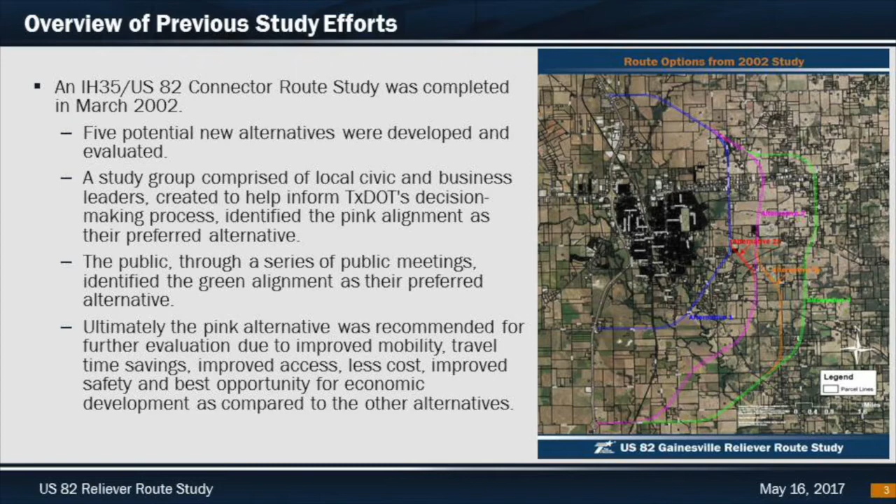The public, through a series of public meetings, identified the green alignment as their preferred alternative. Ultimately, the pink alternative was recommended for further study because of improved mobility, travel time savings, improved access, less cost, improved safety, and the best opportunity for economic development as compared to the other alternatives.

Due to a lack of funding, the project effort stalled until a US 82 feasibility study was completed in 2012. That study identified mobility issues along US 82 and evaluated 7 different route alternatives that could address these issues. Ultimately, Alternative D was selected in the southeast quadrant of Cooke County as the locally preferred alternative based on analysis of each of the alternatives and input from stakeholders and the public.

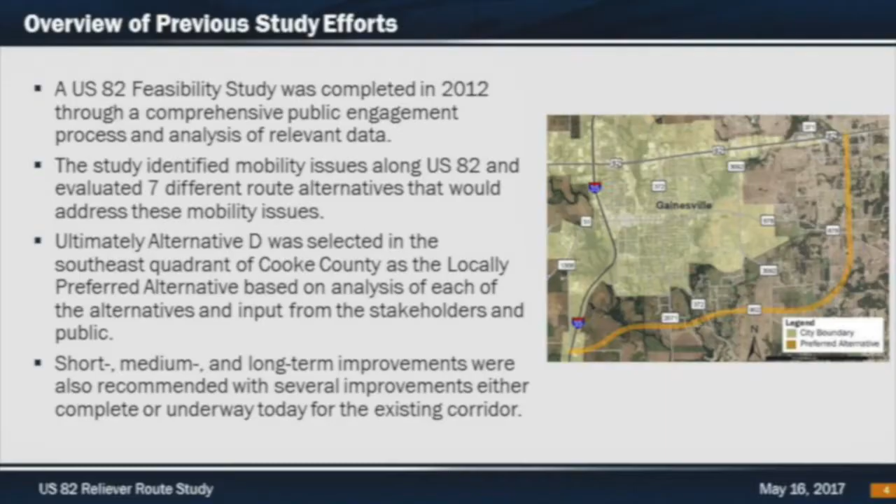Short, medium, and long-term improvements were also recommended along the corridor, with several improvements either complete or underway today for the existing US 82 corridor. Even with these improvements, it became clear to TxDOT and local officials that more needs to be done.

For the current US 82 reliever route study that we're here to talk about today, TxDOT formed a work group comprised of local civic and business leaders to help guide us through the study. The work group reviewed the 3 recommended alternatives from previous studies and identified several new alternatives, ultimately bringing 7 alternatives to the public for input in October 2016, along with a no-build alternative.

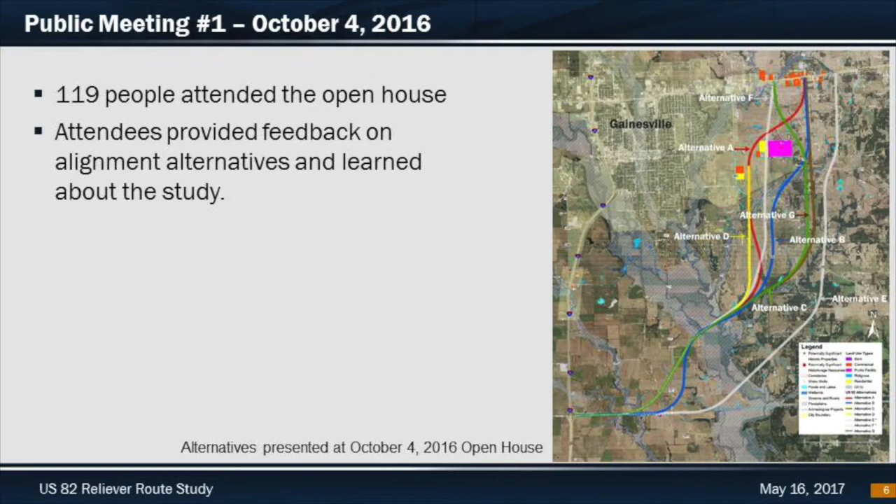On October 4, 2016, TxDOT hosted an open house to get feedback on 7 alternatives. Here, you can see the alternatives that were presented at the meeting. 119 people came out for the open house, and TxDOT received a lot of valuable feedback. Feedback was received via comment forms, email, phone calls, and regular postal mail.

In addition, TxDOT received comments about construction cost, access to property, economic hardship, the impact a reliever route would have on the community, and traffic congestion. After reviewing feedback from the open house, TxDOT developed an online survey to get more input from the public and stakeholders on alternatives. The survey was available from November 10th until December 7th, 2016.

Survey takers were asked what alternatives they recommended using. This information was used by the study team to help refine the alternatives that are being evaluated today. The alternatives being evaluated today were developed and refined based on previous studies, workgroup input, feedback from the first public meeting, preferences from the online survey, and engineering guidelines from TxDOT.

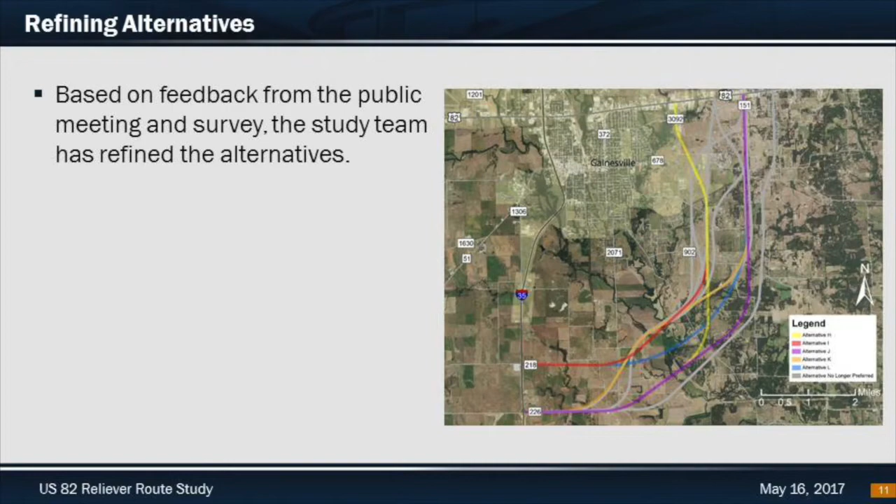We then conduct the initial screening to narrow the alternatives further, which is where we are today. Using all gathered data, professional judgment and public input will then narrow to the most reasonable alternatives. And finally, after construction costs are defined, safety, mobility, and right-of-way impacts are determined, and environmental impacts are quantified, we will reach the draft recommended alternative.

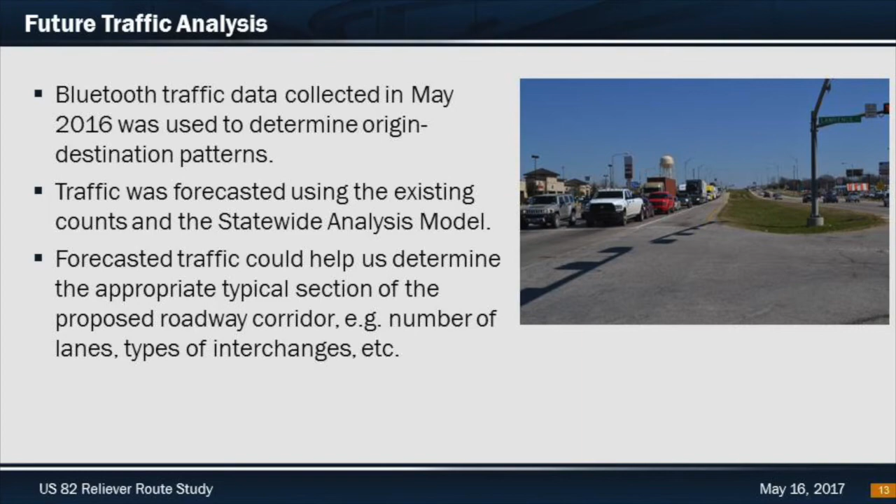The project team gathered Bluetooth traffic data in May of 2016 to determine where people are coming and going in the corridor. Using TxDOT's statewide analysis model, we forecasted traffic that could use a potential reliever route in the future. Ultimately, the forecasted traffic could help us determine the appropriate design of the proposed roadway corridor. For example, the number of lanes as well as types and locations of interchanges.

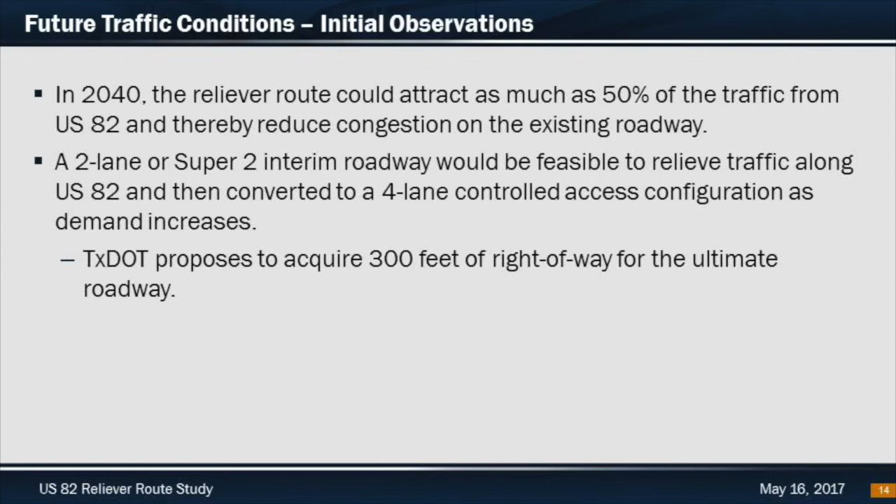Our initial observations project that the reliever route could attract almost half of the US 82 traffic in 2040. A 2-lane or Super 2 roadway for the reliever route would improve mobility along US 82. Ultimately, a 4-lane controlled access highway could be developed as traffic increases. To do this, TxDOT has proposed acquiring a 300-foot right-of-way to meet the needs of the controlled access roadway.

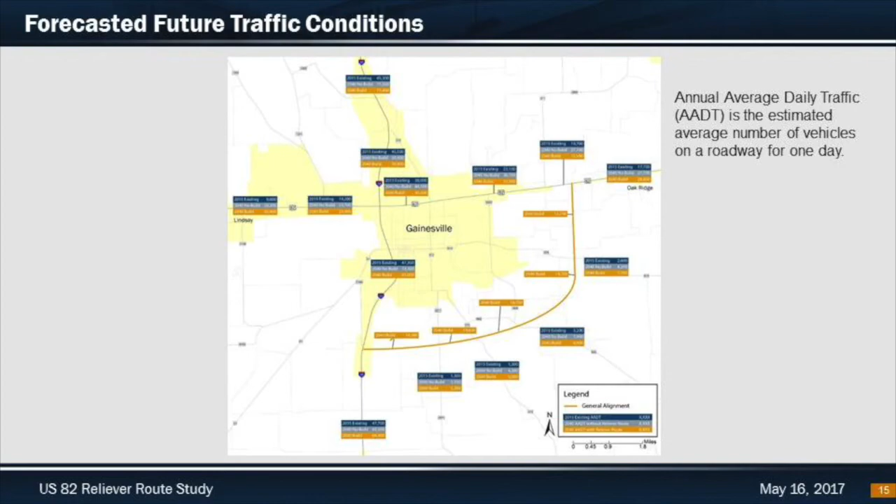This slide provides an overview of what current traffic looks like in the area, as well as what it is forecasted to look like in 2040 with and without a reliever route. In the next few slides, you will see that the 5 alternatives as well as a no-build alternative were evaluated and weighed against each other based on the following.

Cost effectiveness. Is the alternative's length significantly longer than the average of all alternatives, thus increasing cost? And environmental impacts. Looking at potential displacements to residential and commercial structures, potential noise impacts, and impacts to floodplains, wetlands, and parks, are these significantly more than the average of all alternatives?

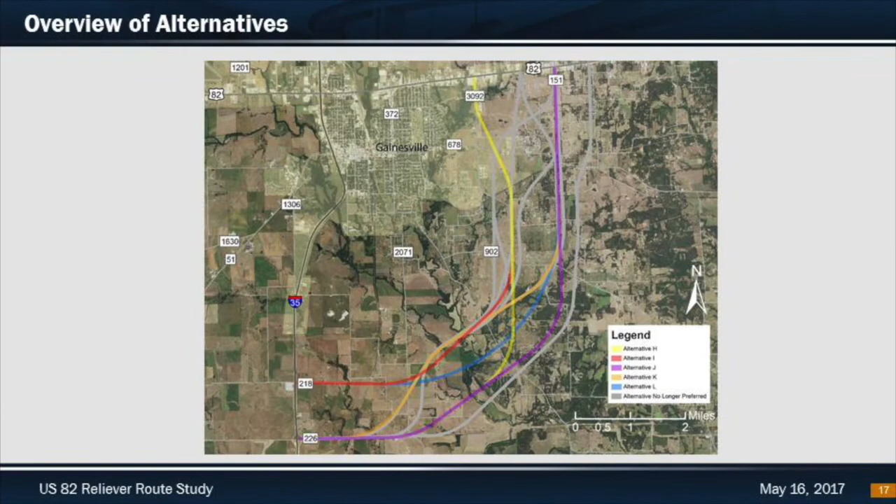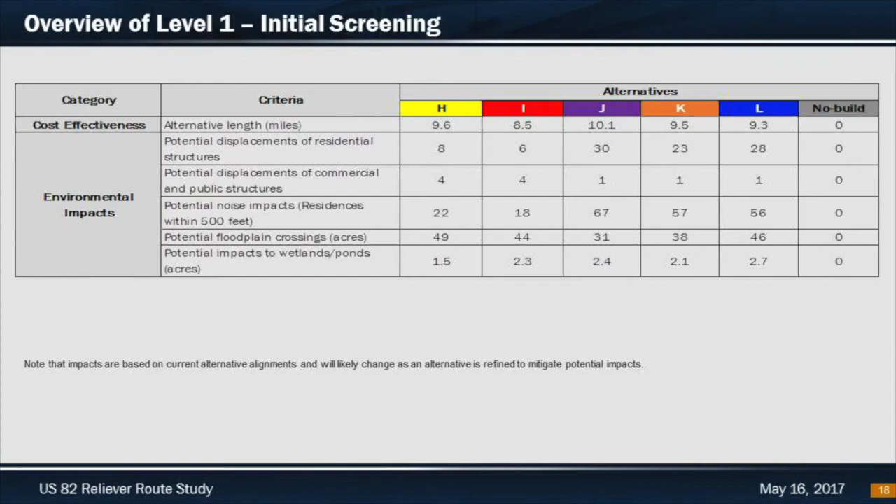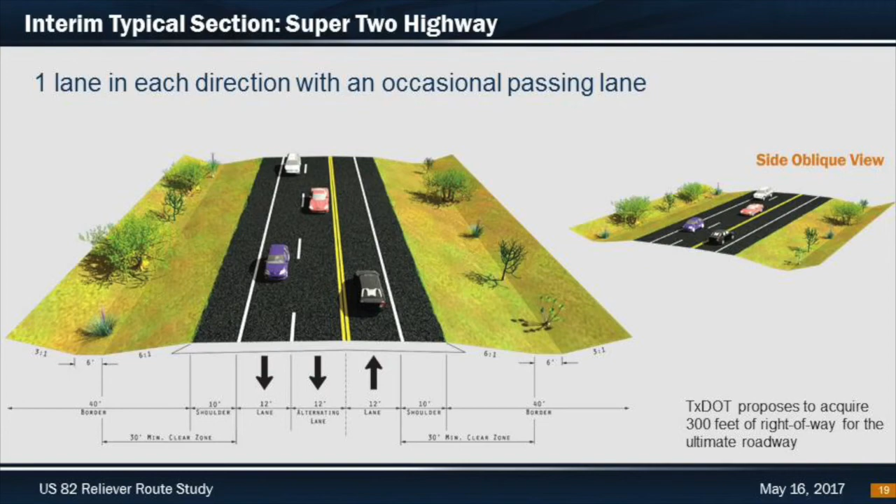Here is a map showing the alternatives that are currently being considered. Here is how the alternatives compare against each other using the criteria we have mentioned before. While TxDOT is looking to acquire right-of-way for a 4-lane controlled access facility, in the interim, a Super 2 or a 2-lane highway could be constructed. A Super 2 configuration is a 2-lane highway with passing lanes and interchanges at major crossroads.

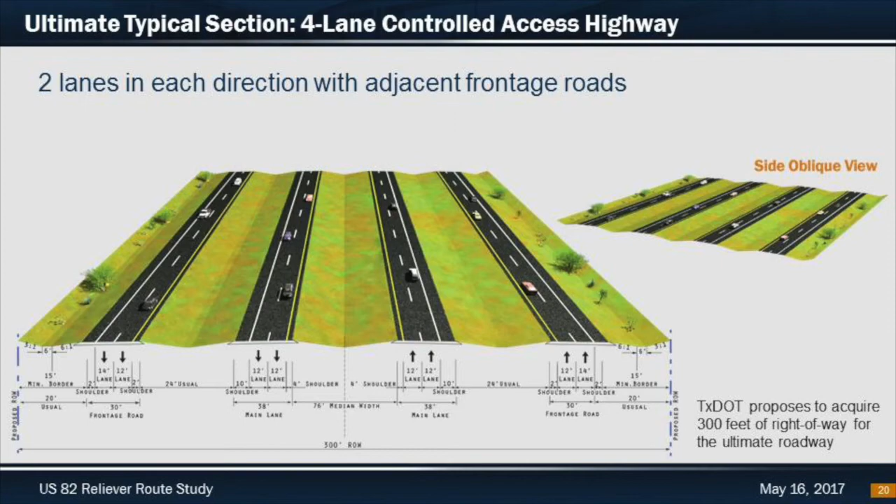A 4-lane controlled access highway would operate at a level of service C or better in 2040. It is TxDOT's preference that this type of highway would ultimately be built as traffic demand increases.

Your input is very important to us. We want to hear from you. What do you think about the information presented here? What are your opinions on the alternatives? So please help us by providing your input. It matters. You can do this in a variety of ways.